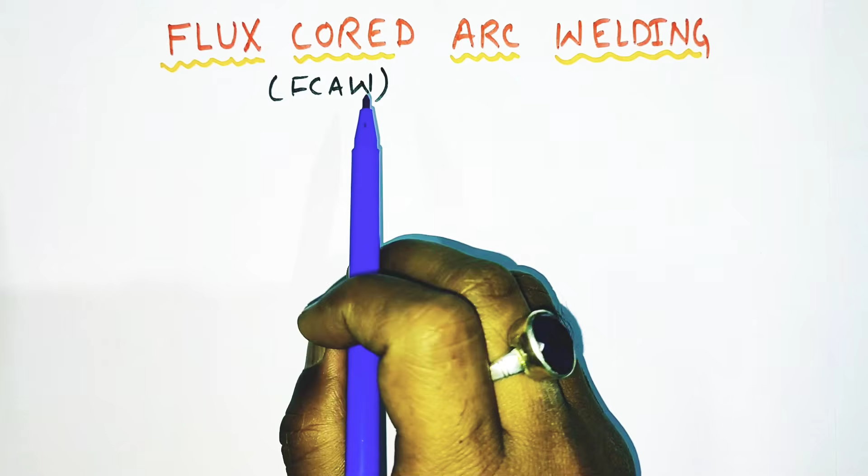Our today's topic is flux cored arc welding. In short, it is called FCAW. So we'll learn about flux cored arc welding today.

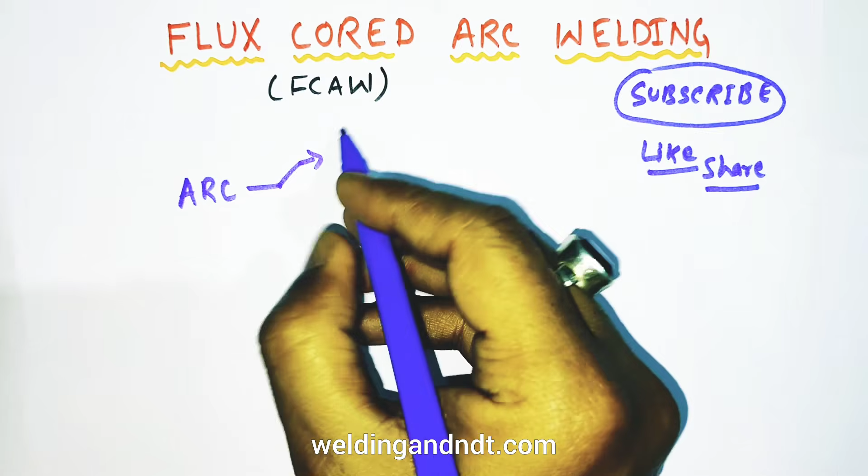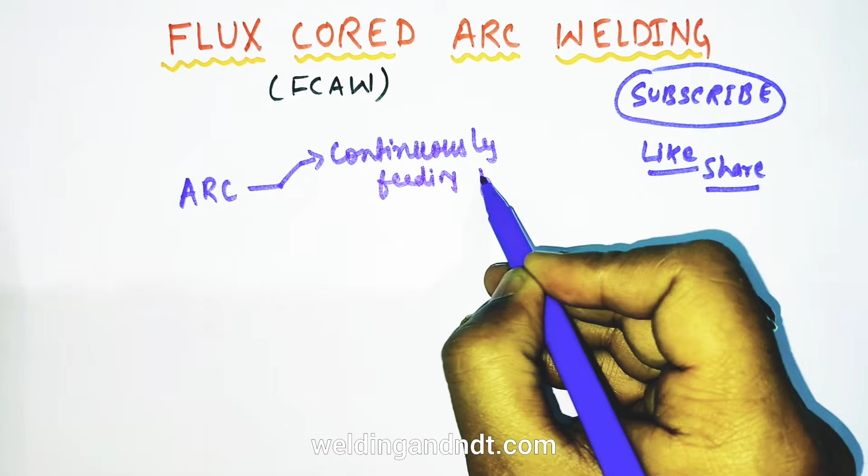So friends, let's start the topic. Flux cored arc welding is essentially an arc welding process, and the required heat for welding is produced by an arc, and that arc is generated between a continuously feeding filler wire and the workpiece. So basically, between the filler wire and workpiece, this arc is generated, and this arc is sufficient enough to produce the required heat for welding.

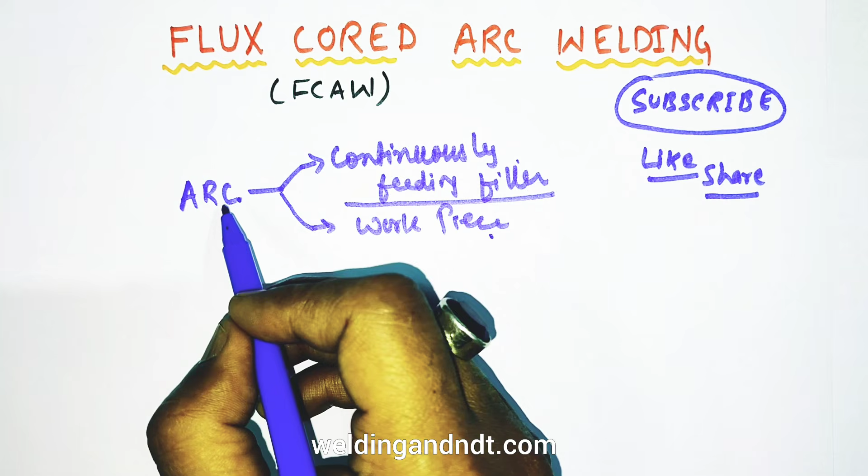Here, the filler wire which is used in flux cored arc welding is of tubular type. Tubular type means it is hollow at the core, and in this hollow section, flux remains. I will show you the cross section of a tubular filler wire of flux cored arc welding. Here, this is the hollow section, and in this hollow section, flux is present. The core is hollow, and in this area, flux is present, and this is our tubular filler wire. So, this is the filler wire which is used in flux cored arc welding.

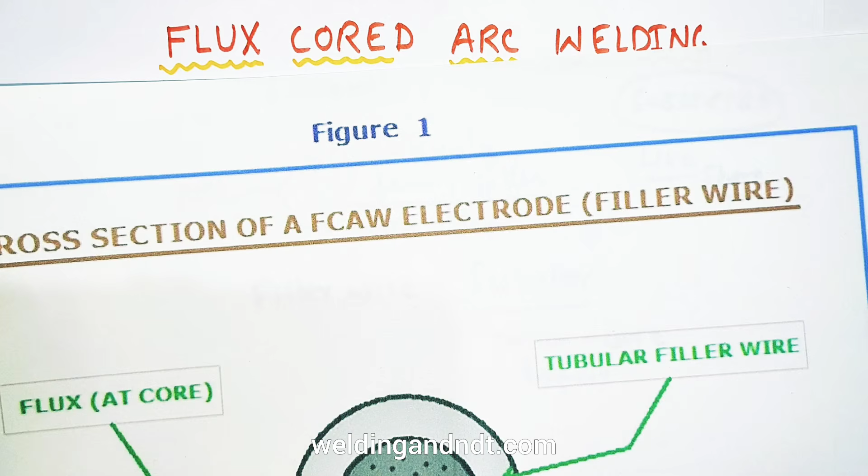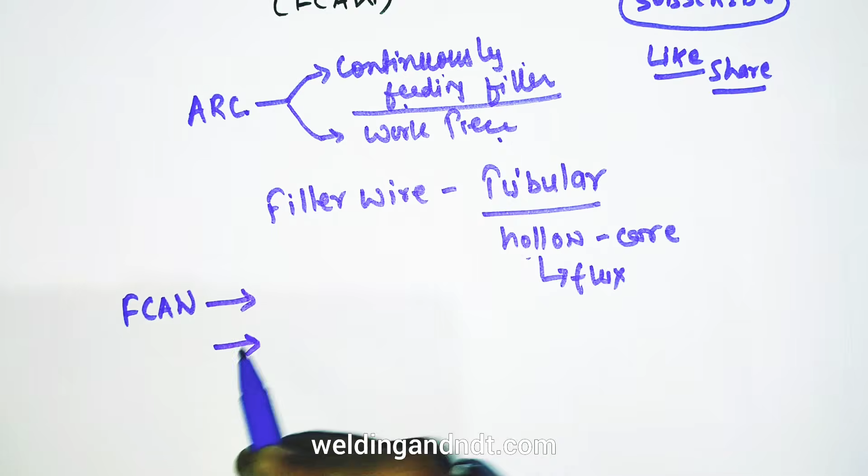Hence, the name is also given flux cored, meaning flux is present at the core of this filler wire. So essentially, there are two types of flux cored arc welding, two variants or two types. First one is self-shielded, also called FCAW-S, and the second one is gas shielded, FCAW-G.

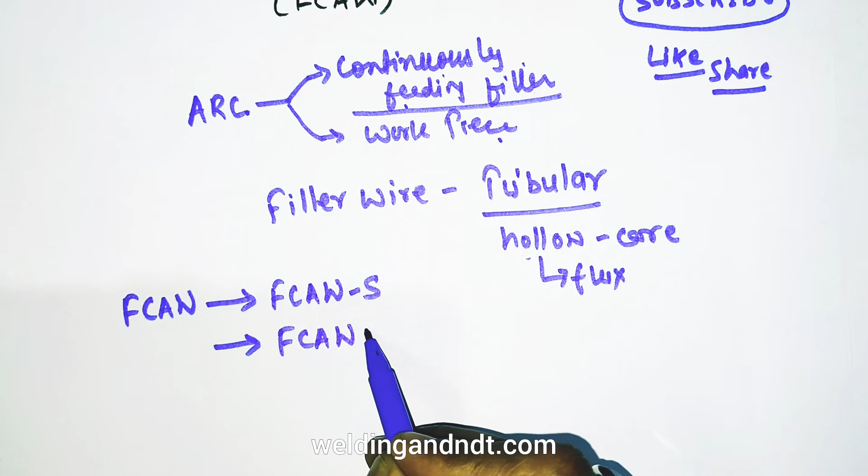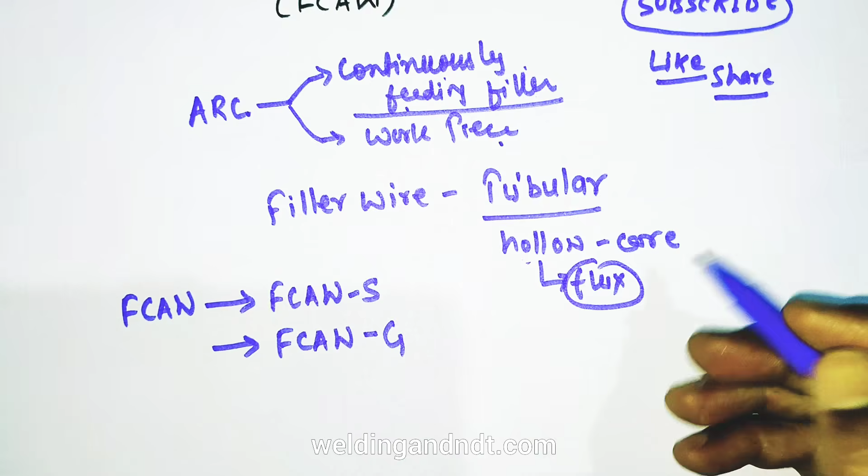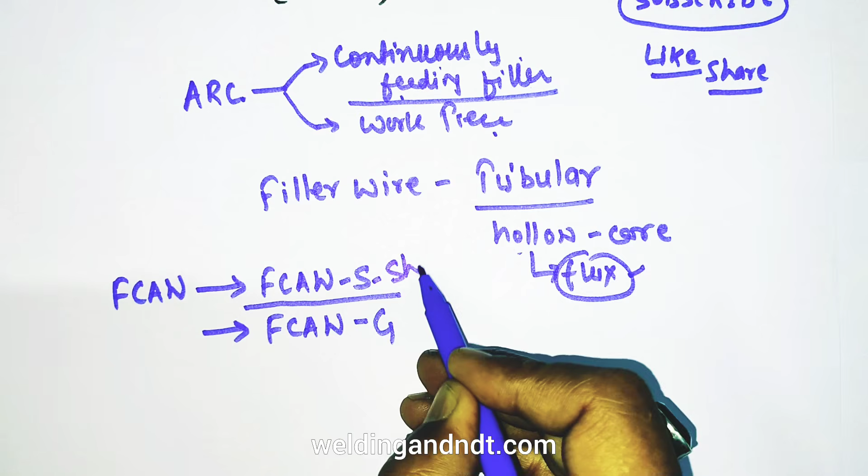Now friends, there is flux at the core, and this flux prevents the molten metal from external contamination. So there are two variants of flux cored arc welding. First one is FCAW-S, S is self-shielded, and the second one is G, G is gas shielded.

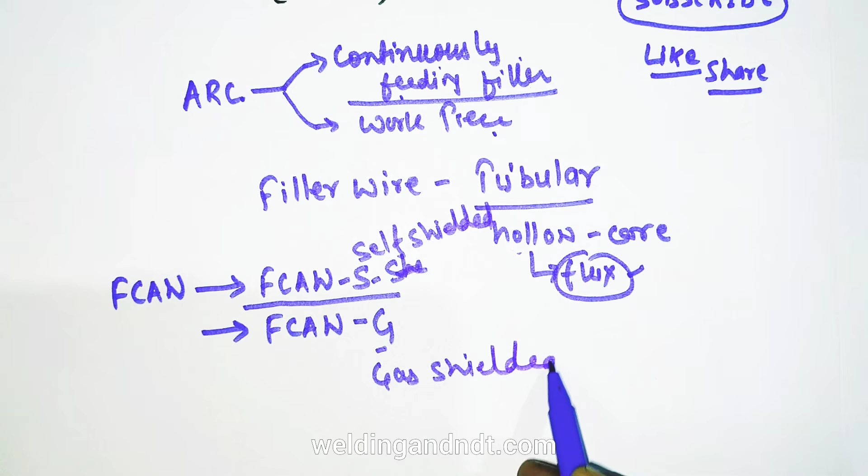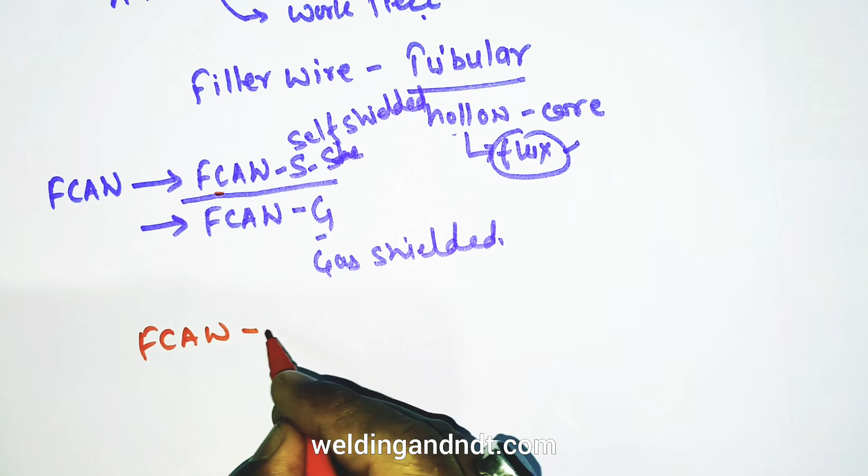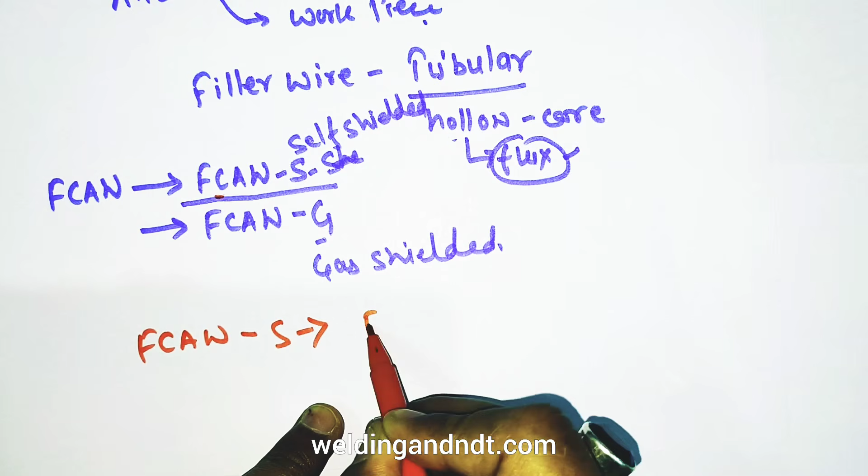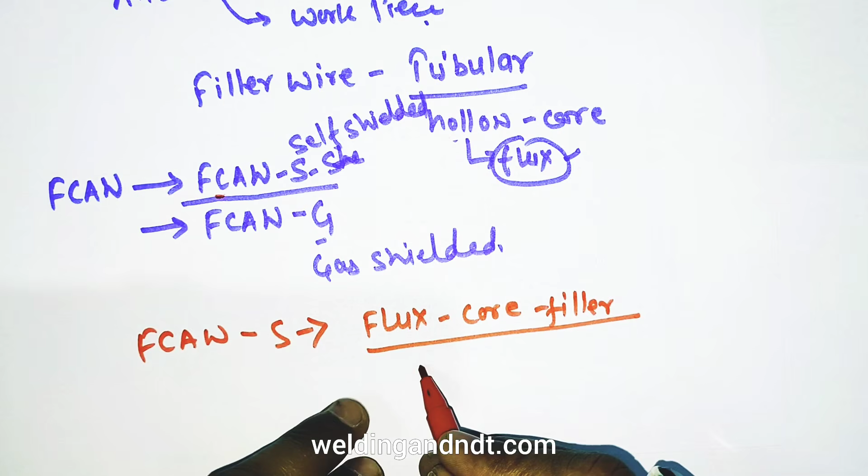So I'll explain the difference between these two. See, in self-shielded, FCAW-S, in self-shielded variant, the shielding of molten weld pool is done by the flux which remains at the core. Flux which is at the core of the filler wire does the primary shielding, and shielding is required to prevent the molten weld pool from atmospheric contamination.

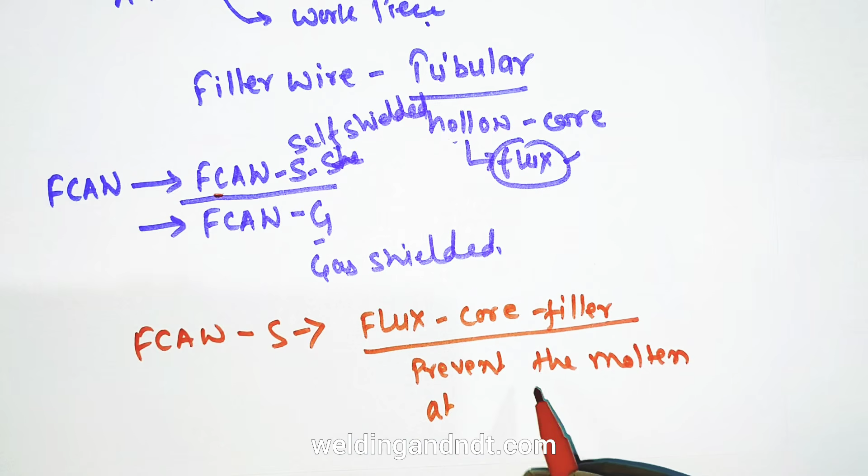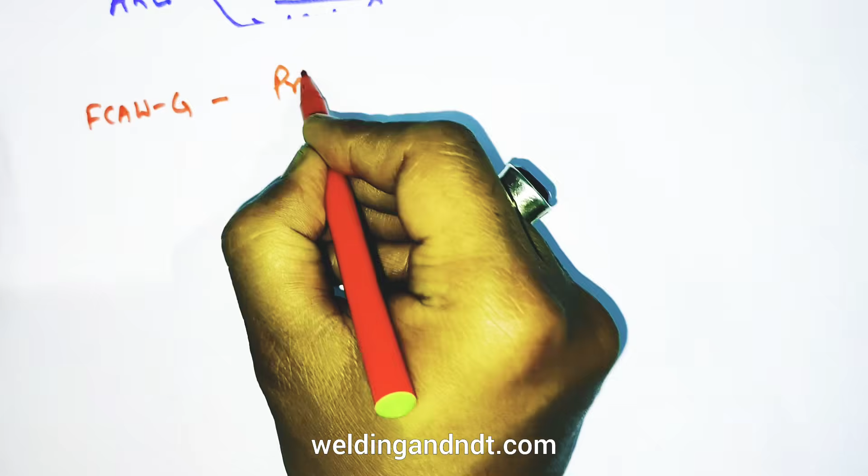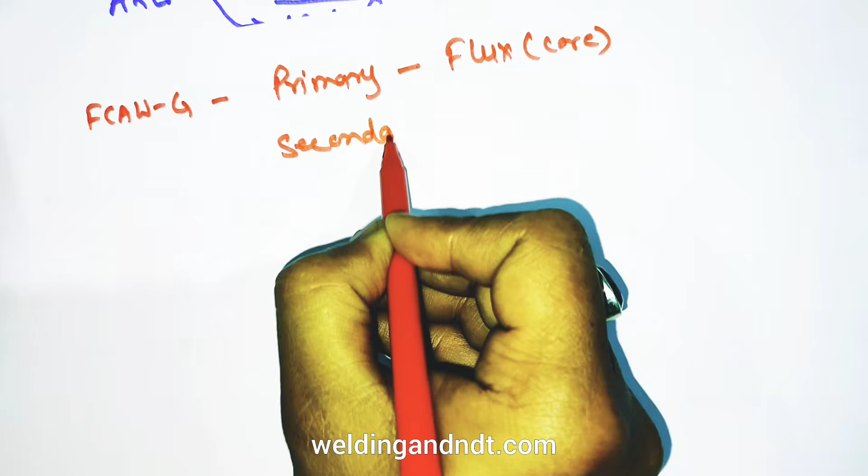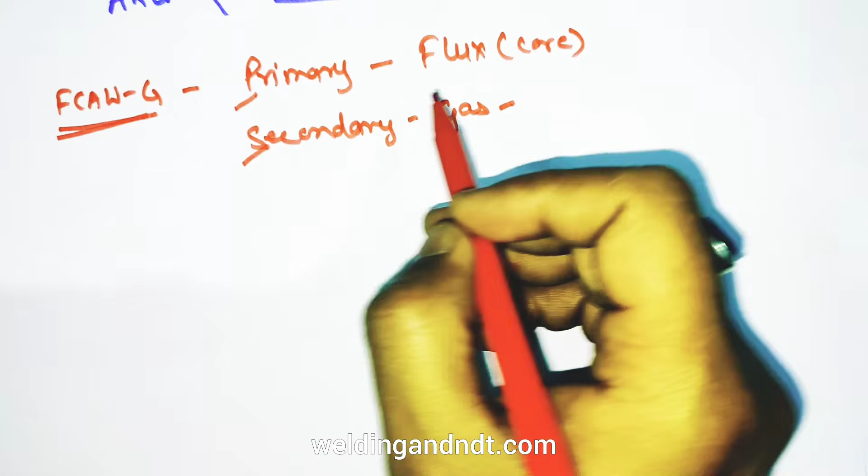Whereas in the gas shielded, there will be dual shielding, FCAW-G. In gas shielding, one primary shielding will be in the form of flux present at the core of the filler wire, and one secondary shielding will also be present, in the form of shielding gas supplied externally from a cylinder. So in gas shielded, two types of shielding are present: one primary which is flux at the core, and the second which is secondary, an external gas, mostly inert or active CO2 like gas, supplied externally.

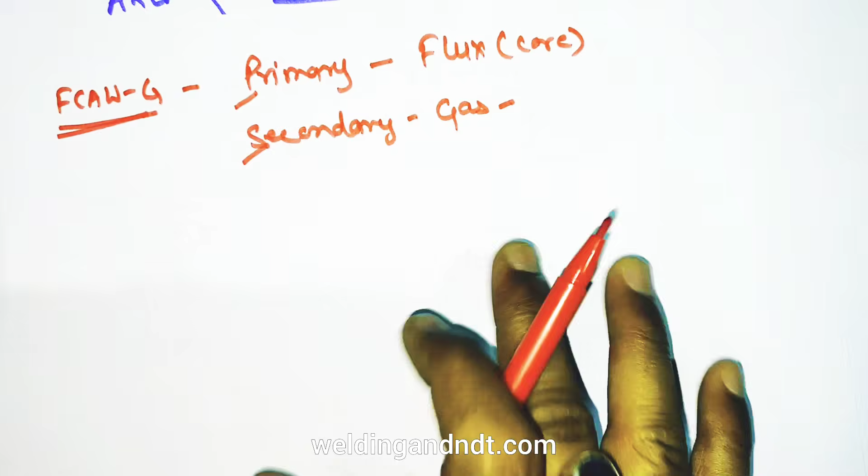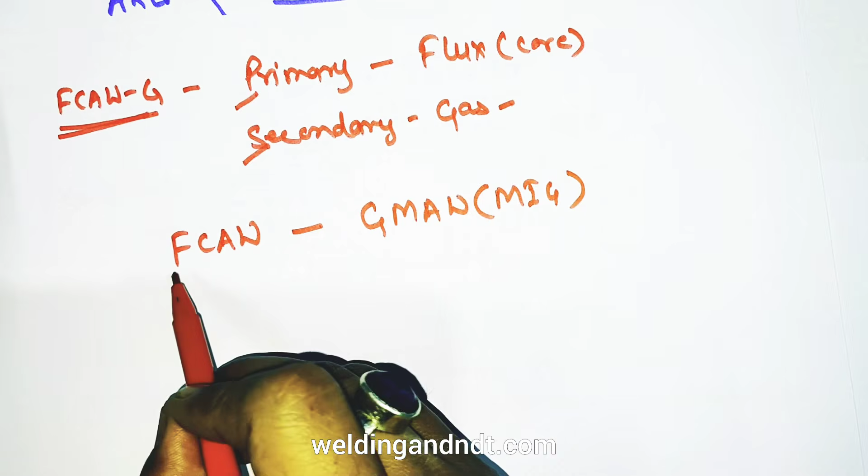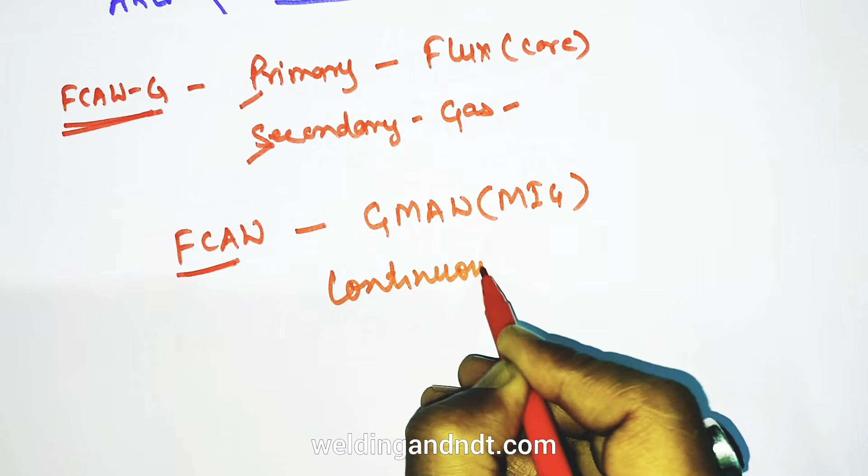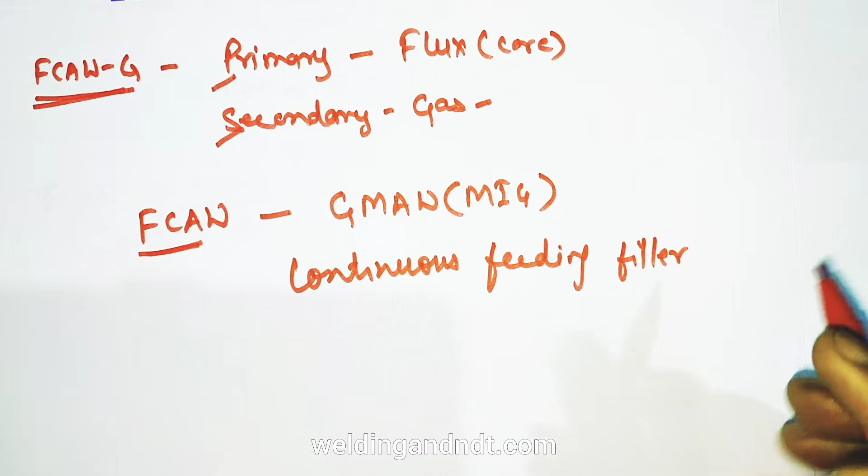So friends, one more thing I would like to tell you is that FCAW is very much similar to GMAW. GMAW is MIG welding, MIG or MAG welding. Flux cored arc welding is similar to GMAW because both processes use a continuous feeding filler metal. The filler metal is continuously fed in both materials, MIG as well as FCAW.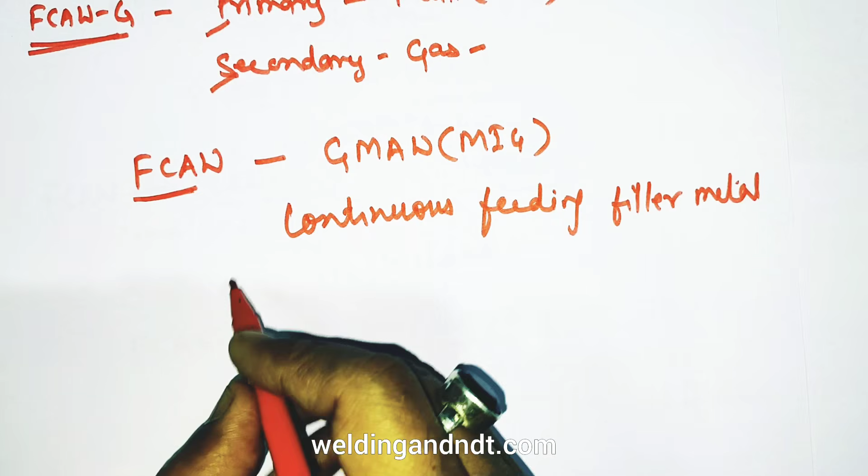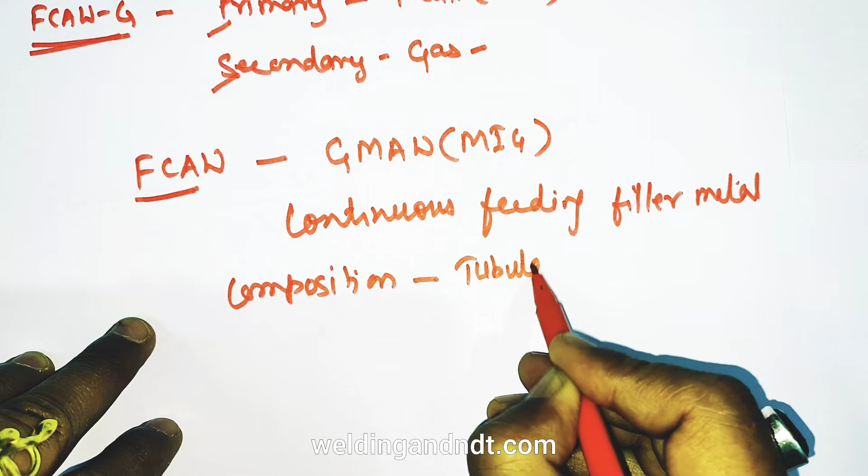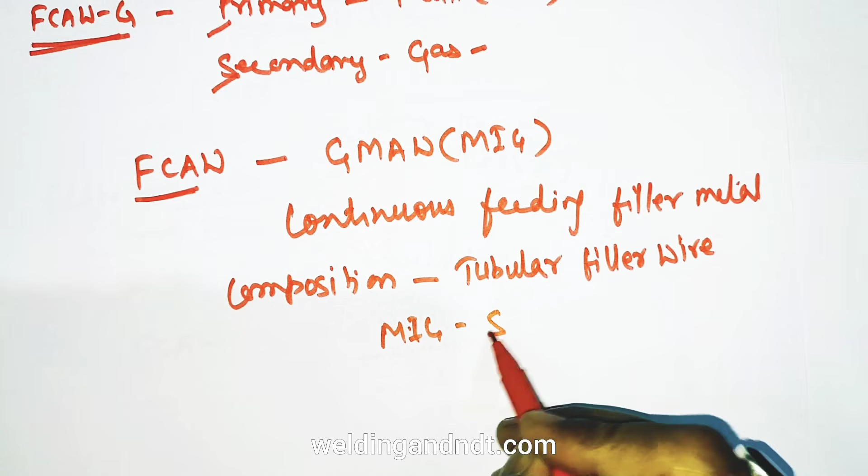But the basic difference between these two is the composition of filler metal. As I told you earlier, in FCAW, tubular filler wire is used, in which flux is present at the core. Whereas in MIG welding or GMAW, solid filler wire is used. So this is one difference, and the second difference is the shielding.

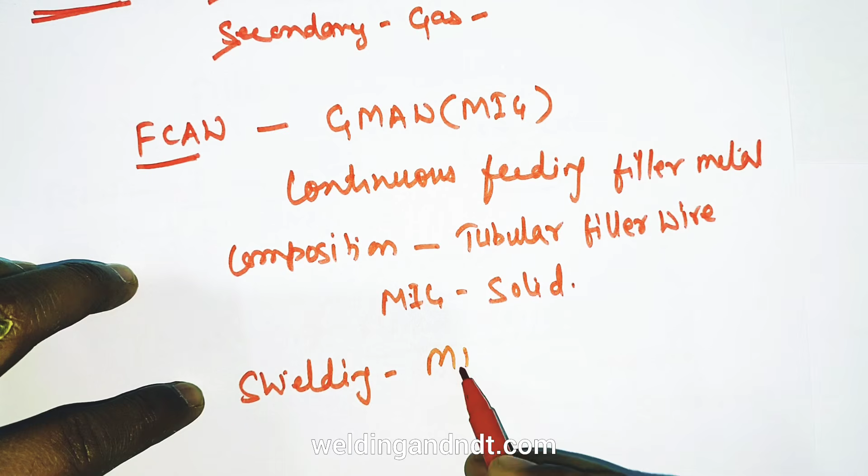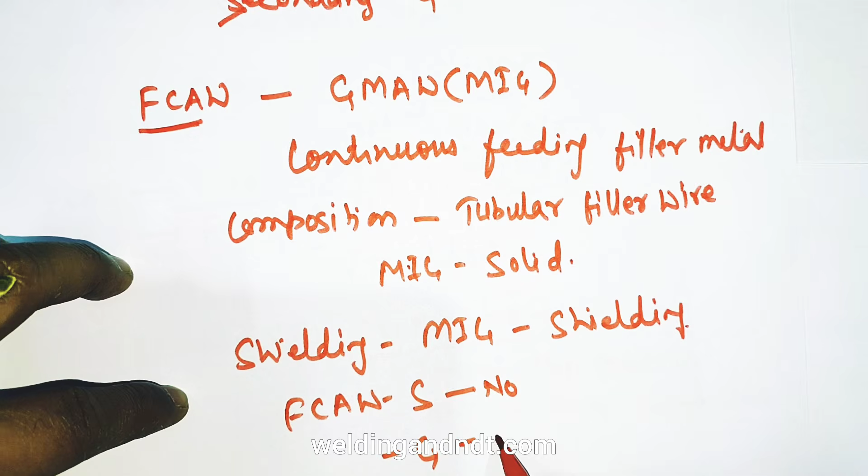In MIG welding, shielding gas is always used. Whereas in FCAW, if it is a self-shielded variant, no shielding gas is required, and if it is gas shielded, then shielding gas is used. So these are the two basic differences between FCAW and GMAW.

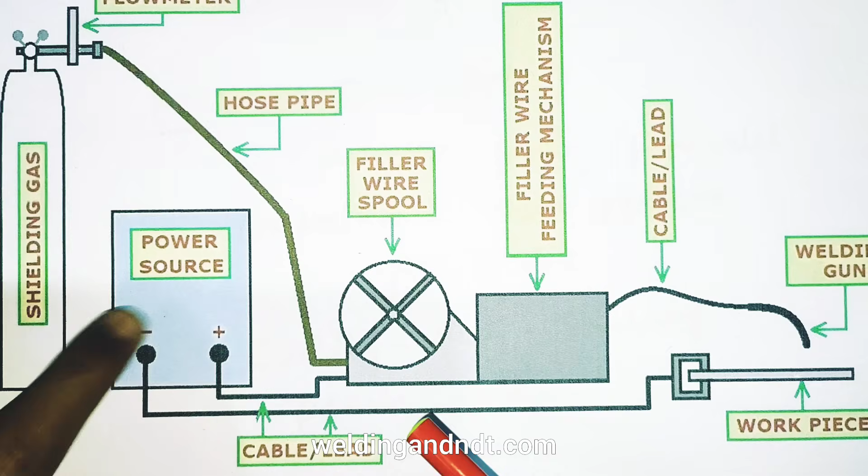Now I will show you the basic setup of FCAW. If our FCAW is gas shielded, then there will be shielding gas, one power source, filler wire spool, feeding mechanism, lead and cable for connection, workpiece, and welding gun. So this is the basic setup of FCAW.

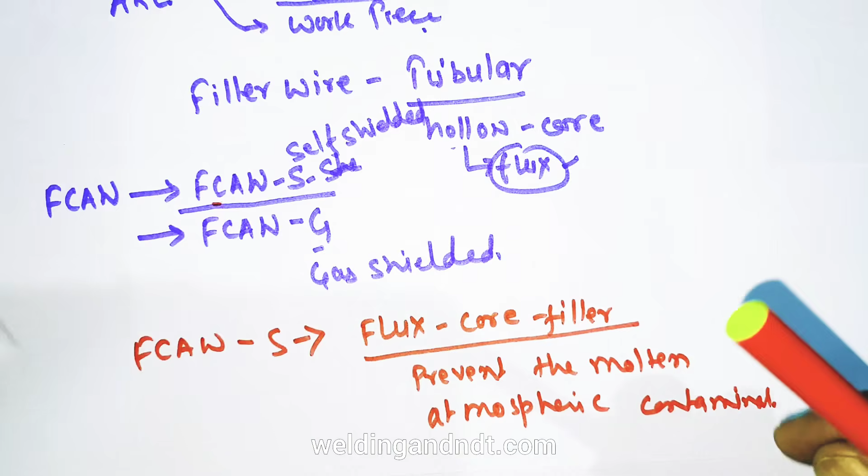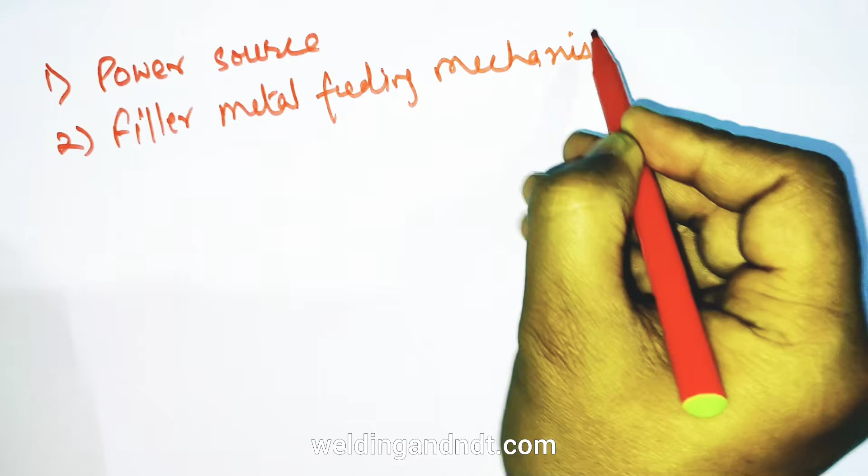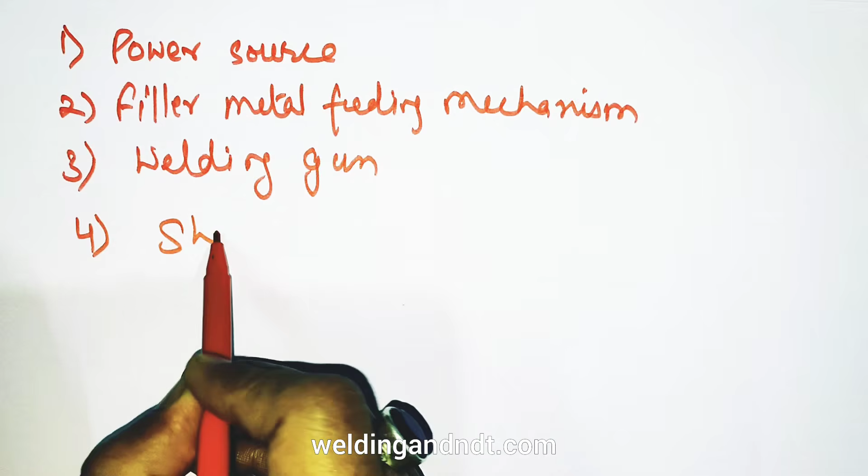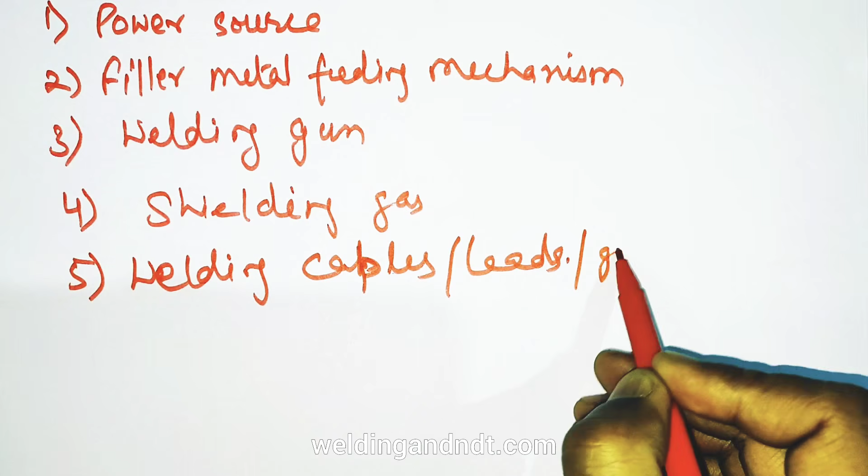I will write it down and then explain one by one. We require a power source, then we require a filler metal feeding mechanism, which will be able to feed the filler metal continuously. Then we require a welding gun, then we need shielding gas, if it is a gas shielded FCAW. Then welding cables and leads, and gas hoses. So these are the basic equipment required for FCAW.

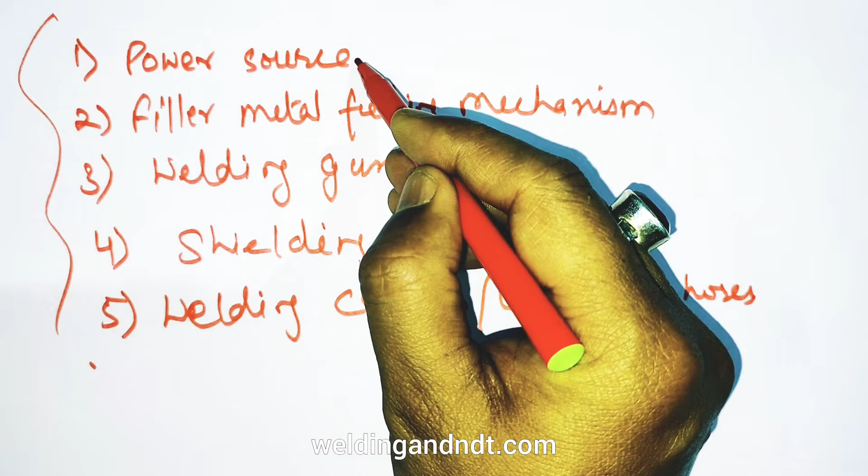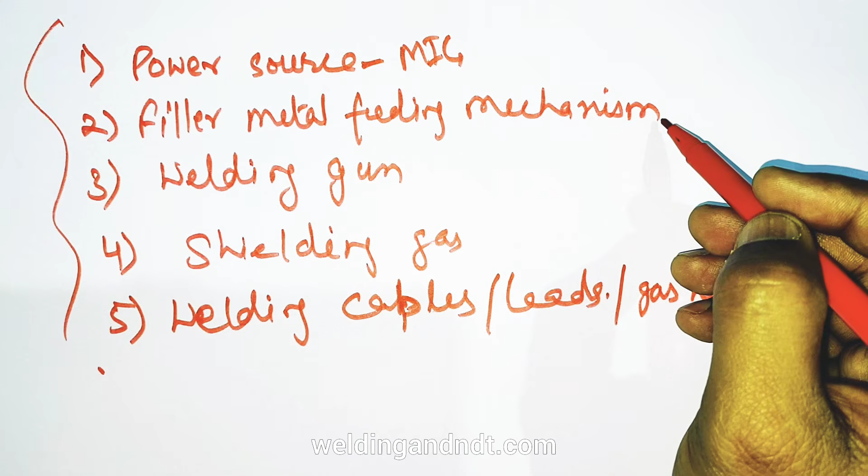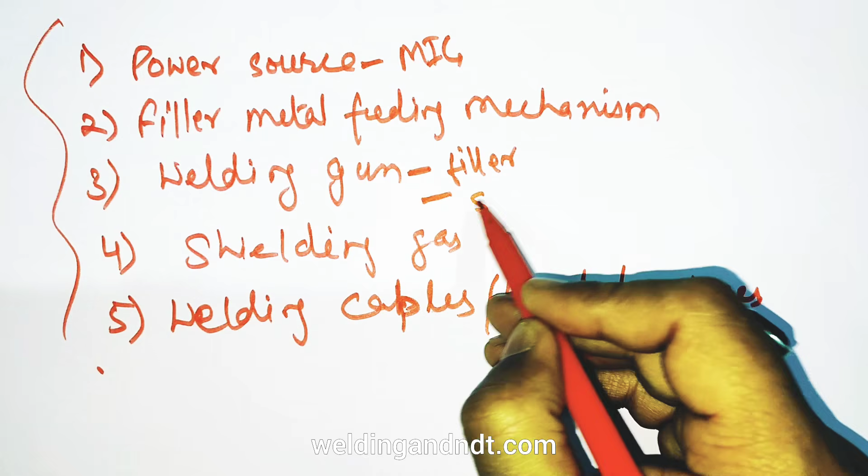The power source is very much similar to MIG welding power source, and the filler metal feeding mechanism is also similar to MIG wire feeding mechanism. The gun is also very much similar to MIG wire gun, and it should be able to feed the filler wire and give a smooth passage of shielding gas like in MIG welding. So shielding gas and welding cables are required for FCAW.

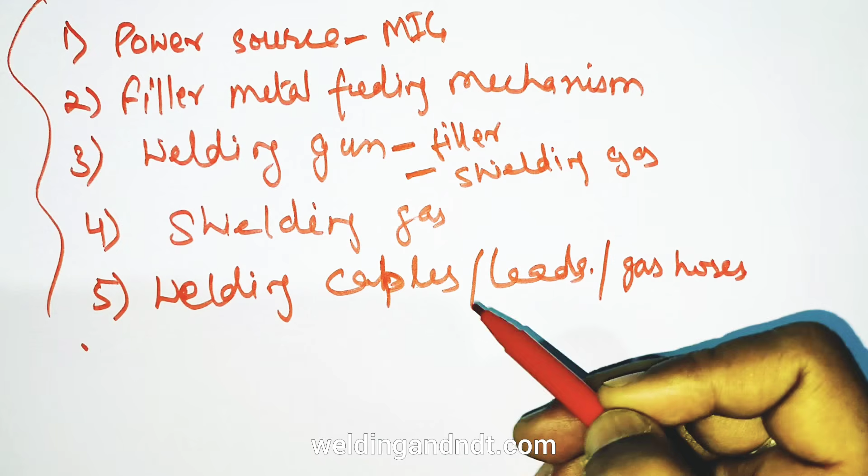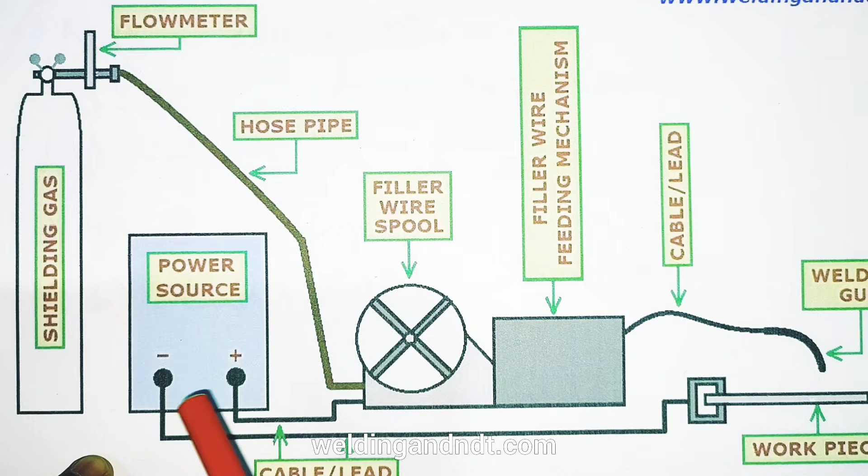I'll once again show the basic setup diagram of FCAW. Here we have shielding gas, we have power source. There will be two terminals of the power source. One terminal will be connected with the workpiece, the other terminal will be connected with the welding gun, through the feeding mechanism, and there will be a filler wire spool which will rotate and continuously feed the filler wire. So this is a continuous process.

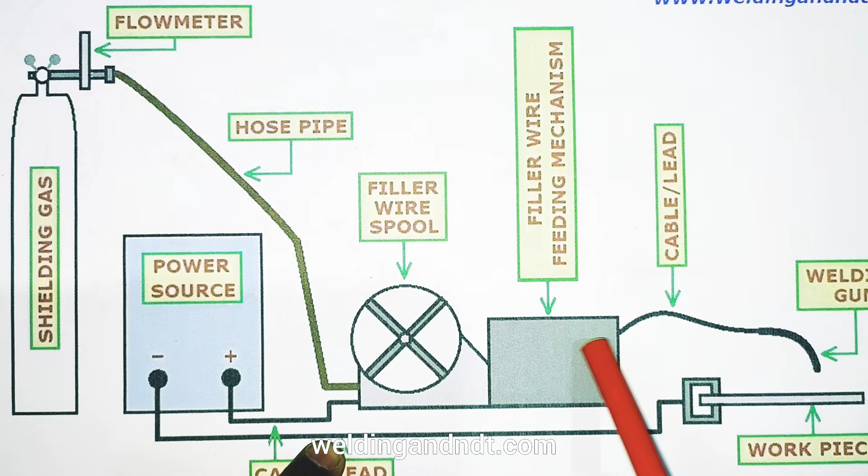Continuous welding will be done with the help of FCAW, like whatever we see in MIG welding, and there will be cable and lead to support the connections. One hose pipe will also be there for the passage of shielding gas. So this is the basic setup of FCAW.

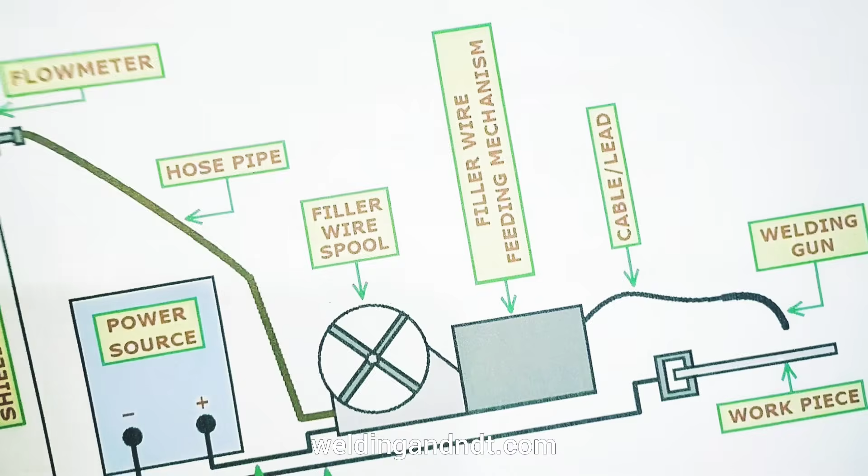Now friends, we'll discuss briefly the advantages and limitations, or we can say the disadvantages, of FCAW.

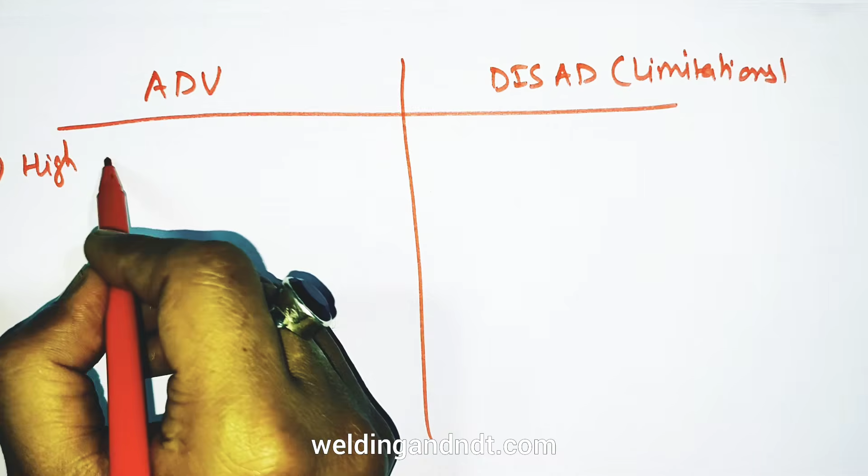FCAW produces high deposition rate and its productivity is also very high. So the main advantage is high deposition rate and higher productivity.

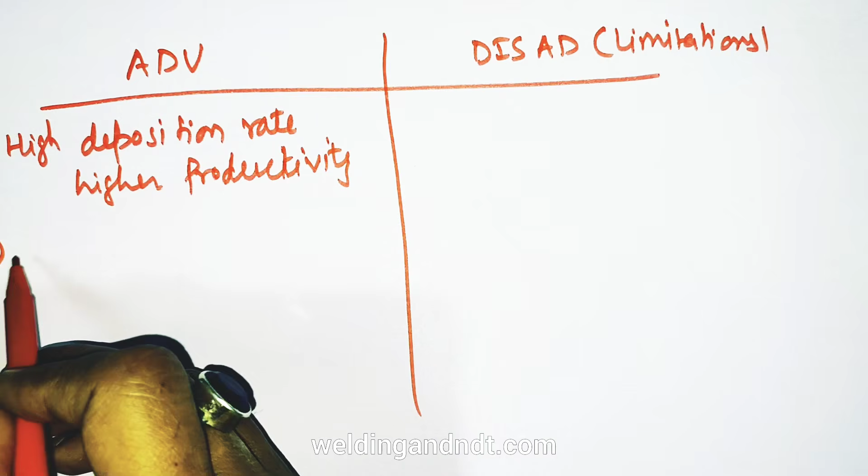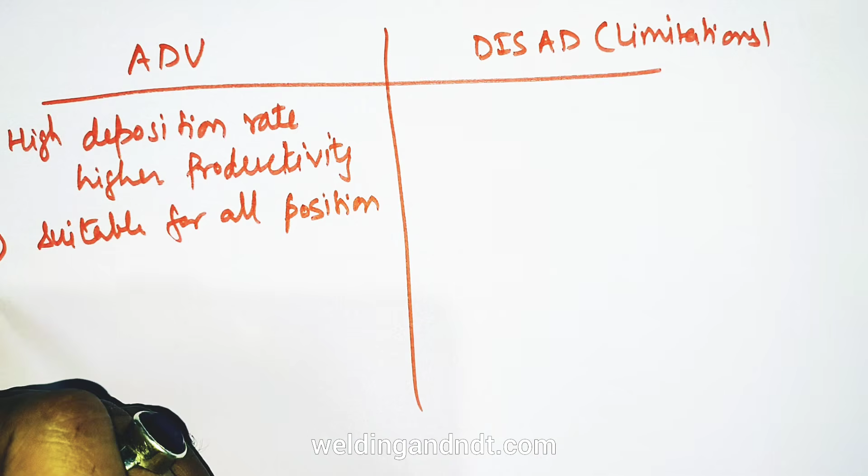The second advantage is it is suitable for all positions. Meaning we can do welding in overhead position, flat position, vertical position, horizontal position, whatever position we require, we can use FCAW.

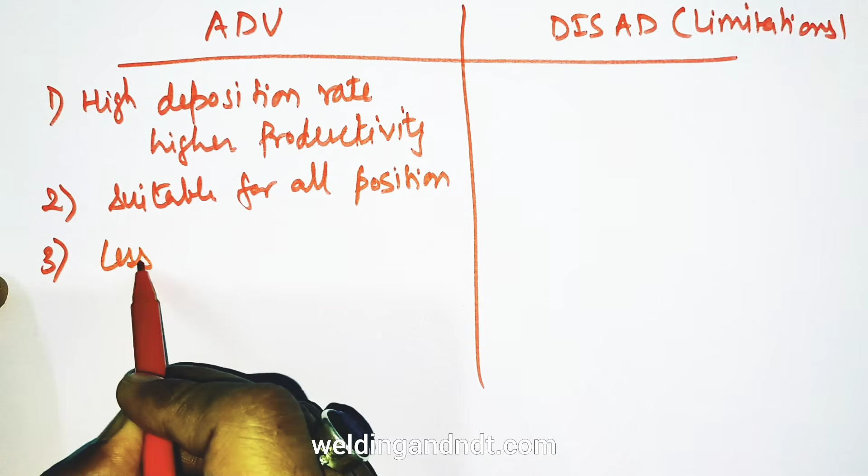It is consistent with lesser welding defects. Chances of getting welding defects are less.

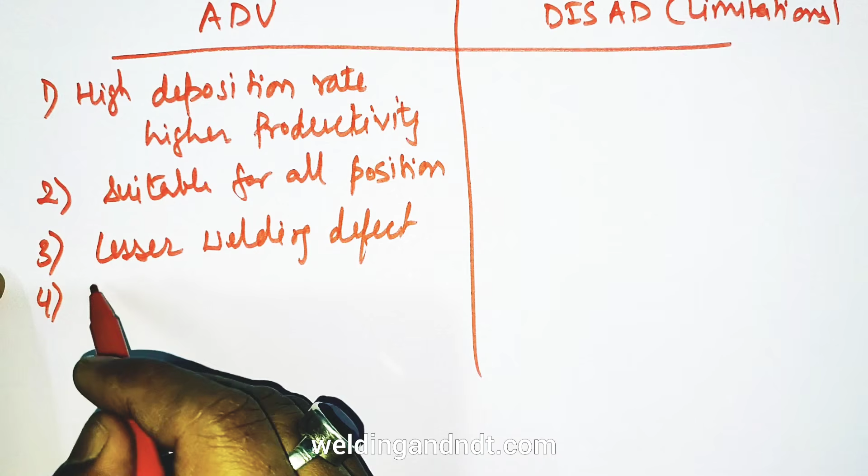The fourth advantage is high quality, it gives high quality work. The fifth one is it provides excellent penetration.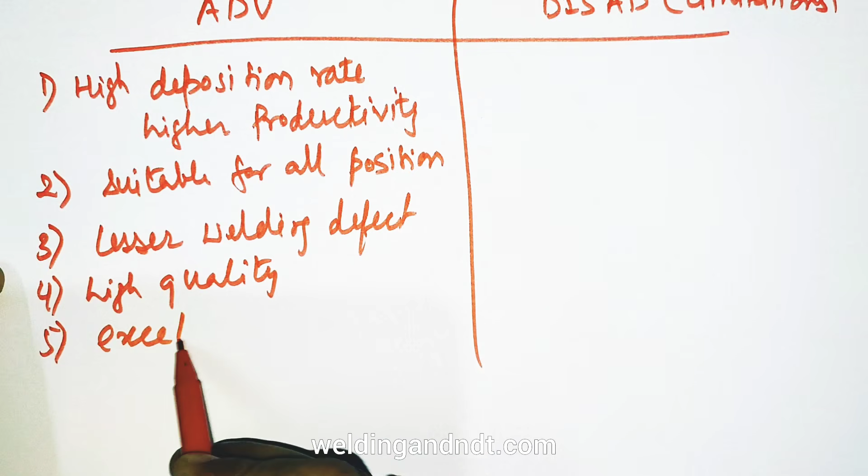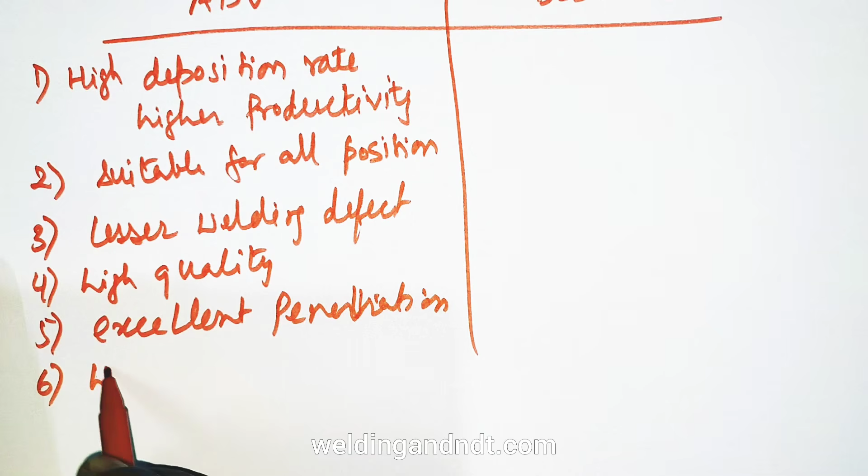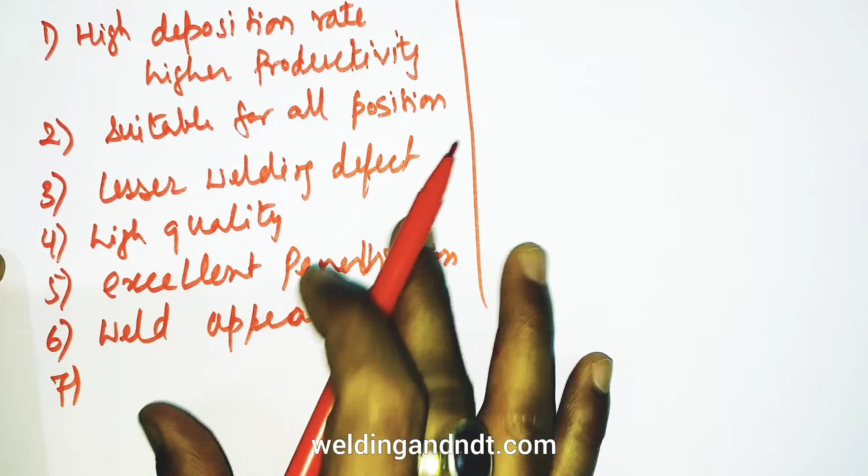Now the weld appearance is also smooth and good. And the seventh advantage is less distortion - you'll get less distortion in FCAW.

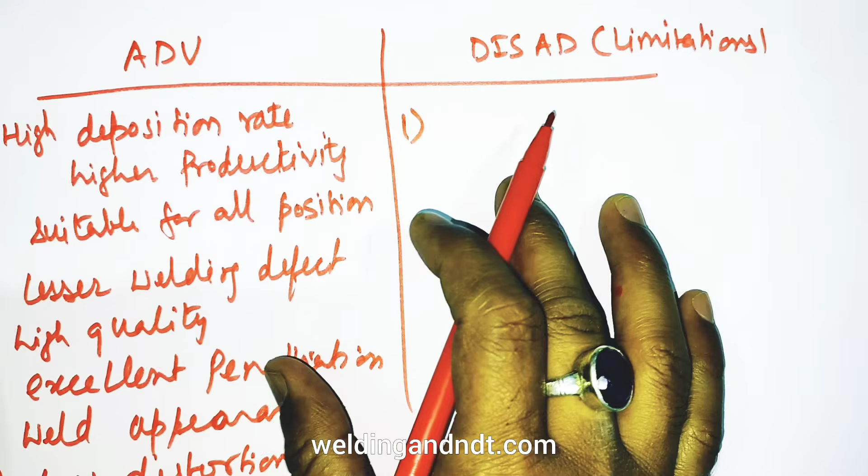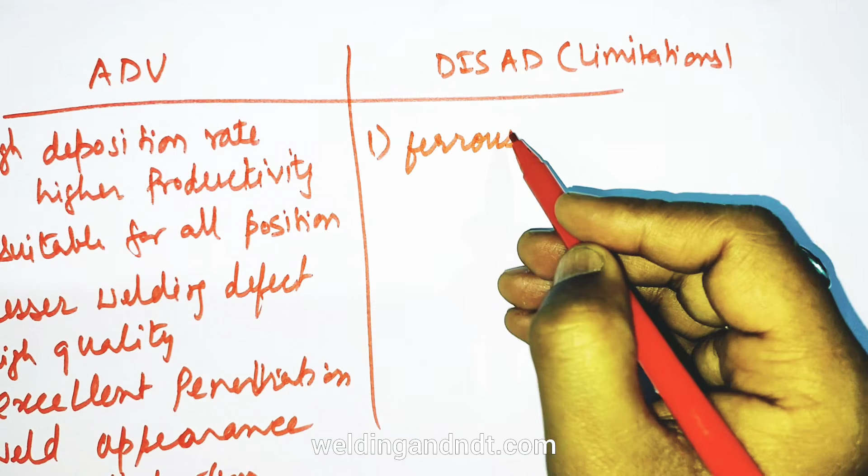So these are some of the advantages. Now we'll briefly discuss the disadvantages. The first and basic disadvantage is it is useful only for ferrous and nickel based metals - it is limited to only ferrous and nickel based alloy welding.

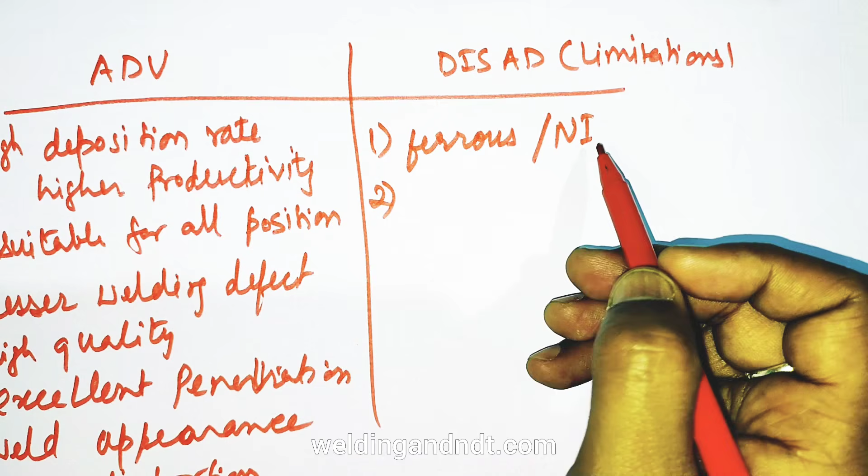The second disadvantage is that due to the presence of flux at the core, it gives slag on the top of the weld metal, so slag needs to be removed.

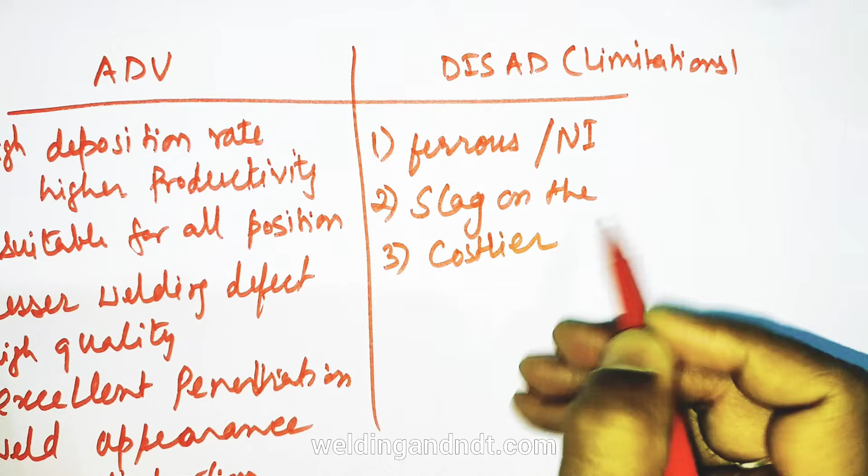The third disadvantage is costlier equipment. The equipment is quite costly, and it is also complex if we compare to SMAW.

The fourth disadvantage is it produces more smoke and fumes.

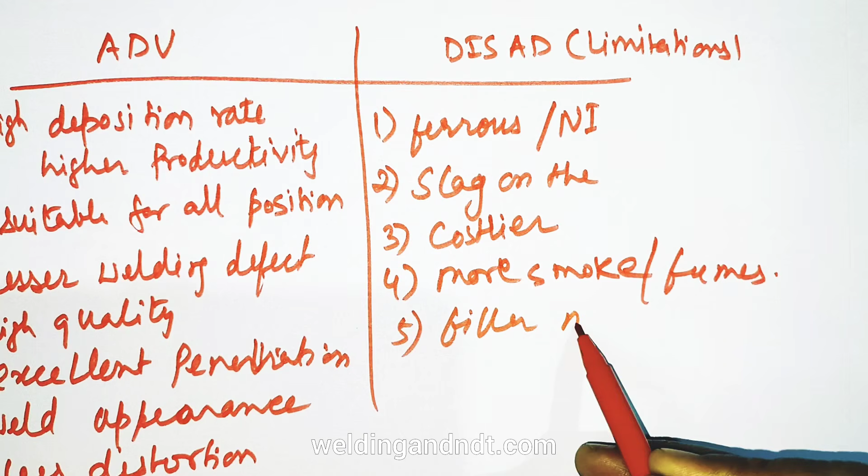And the last disadvantage is the filler metal cost - filler metal cost is also high if we compare to MIG welding.

So friends, these are some of the advantages and disadvantages of FCAW.